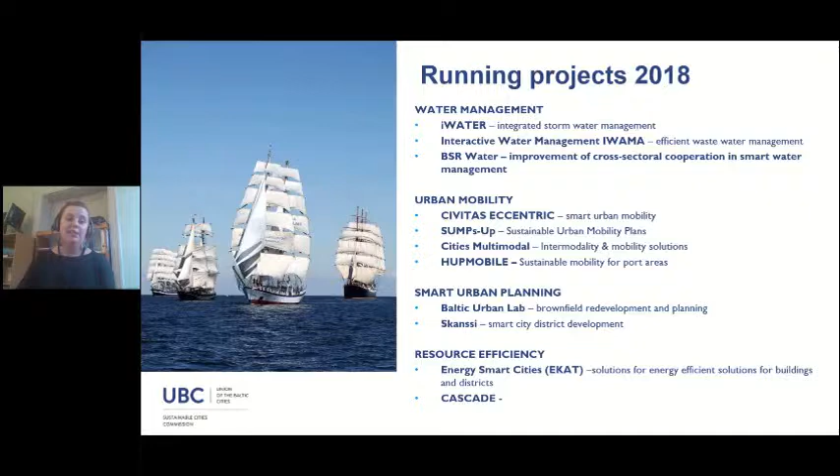When it comes to our upcoming events, as I mentioned earlier, IWAMA, our big project, will have its final conference here in Turku on January 31st. At the conference, they will be sharing experiences of the project, results, and the tools within IWAMA.

We will also arrange more webinars, which will hopefully start on time and be a bit more consistent. Next February, we're planning on having a water-related webinar. During this webinar, you'll get to have a little poll and vote on what topics you would like to have webinars about, in case you're interested in joining in the future as well.

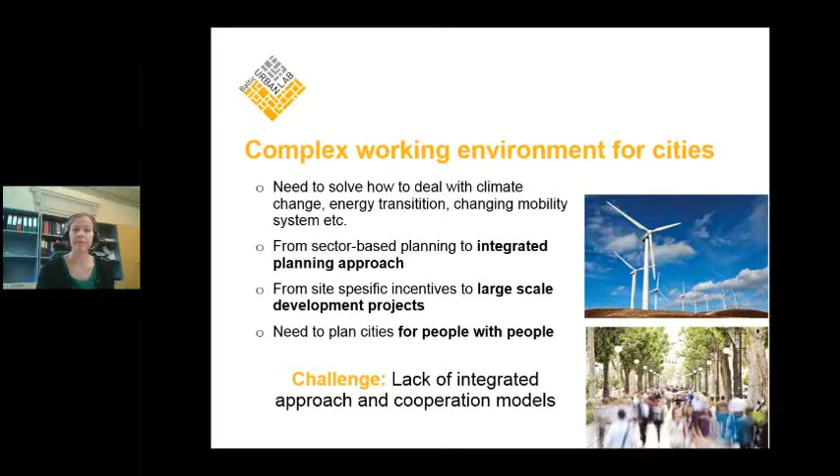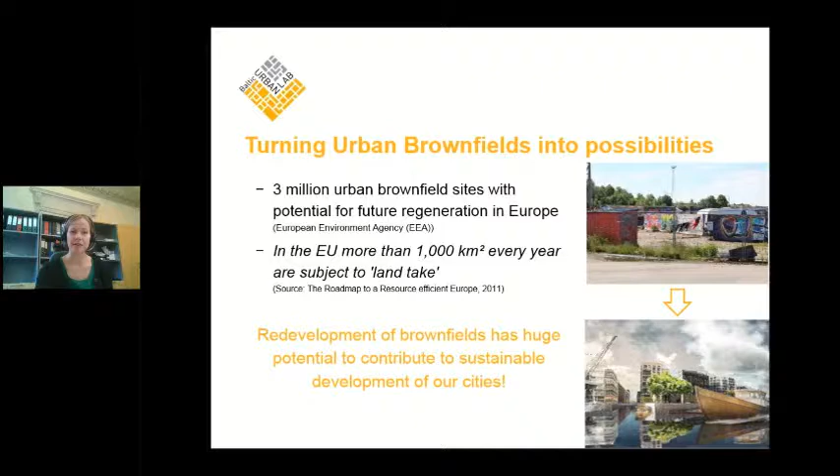Brownfield development is quite a complex process. It requires dealing with the past of the site and its contamination, but without losing the cultural and industrial heritage related to the site. At the same time, it also requires planning for the future and how the site should be used, for example in 20 years.

Based on discussions with different cities around the region, we've noticed cities have very common or similar challenges when it comes to brownfield development. Land ownership is often quite fragmented, and there's usually a very large number of different stakeholders involved, like landowners, developers who would like to invest, citizens, and companies acting in the area. This causes a lack of common development vision. And we shouldn't forget the technical, geological, legal and financial challenges when it comes to remediating the contaminated land.

We believe close cooperation and partnerships between different actors is very important, especially in brownfield development, from the beginning of the planning process, to tackle these key challenges. Due to the complex nature of brownfield development and the related high risks, it's very important to find from the beginning a common understanding and commitment to the process between the different actors involved.

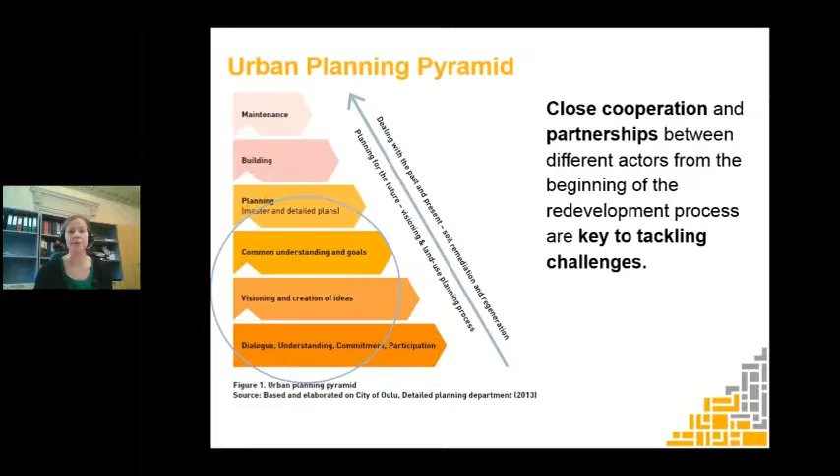The process should always start with an open dialogue involving different stakeholders as well as citizens in the planning. But often cities lack methods, practices and previous experience in how to engage these different actors in the planning process. We've tried to deal with this in the Baltic Urban Lab project, a 3-year project looking at how to support more open, inclusive and efficient planning of brownfield areas.

The aim has been to test integrated planning and partnership models for the development of 4 brownfield sites. This has been done in practice in 4 pilot areas: Norrköping, Tallinn, Turku, and Riga. Together with stakeholders, they have tried to find a vision and development plan for each area, and tried to engage different actors better in the process by testing traditional engagement methods, but also very novel approaches.

Based on the experiences in the project, we wanted to share our experiences with other cities, which is why we prepared this guide. It's based on practical experiences from these city pilots, but also dialogue with other cities. The guide demonstrates a more integrated and systematic approach to planning brownfield development, focusing especially on the early stage of development and planning, with the perspective of how to engage different stakeholders better. It also includes concrete case examples and useful tools for other local authorities tackling the same challenges, and is available in different languages.

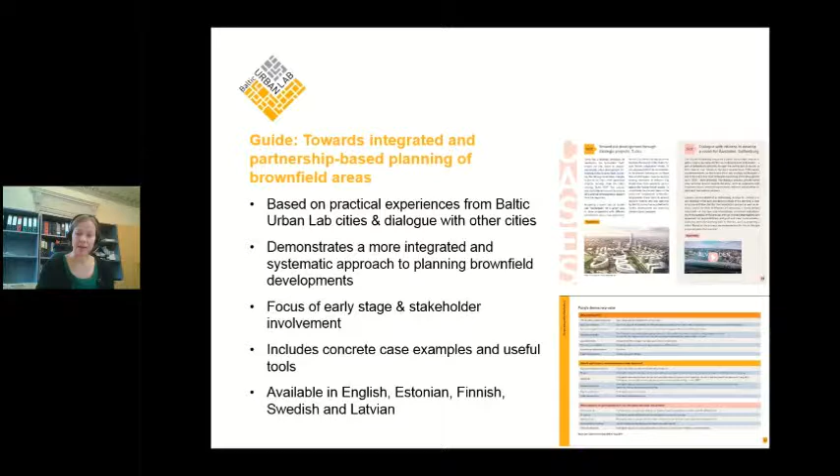Of course the planning system and procedures, as well as the organizational setup, are different for each city, and each development process has its own challenges, specific context, and stakeholders.

We have identified that there are always certain issues in the development process that should be taken into account. So we have gathered in this guide 10 crucial topics that should be considered in a brownfield planning process, so that these public-private-people partnerships could be better supported and the planning process could be more open.

The guide has been divided into 2 sections. First is internal organization and preparation, how to organize the process within the city administration. The second is focusing on really cooperating with different stakeholders.

There are several stages in both the soil remediation and regeneration process, when we talk about how to clean the contamination of the soil, as well as in the visioning and land use planning process, when stakeholders could and should be involved. Of course, their role and the benefits gained from cooperation also vary from step to step.

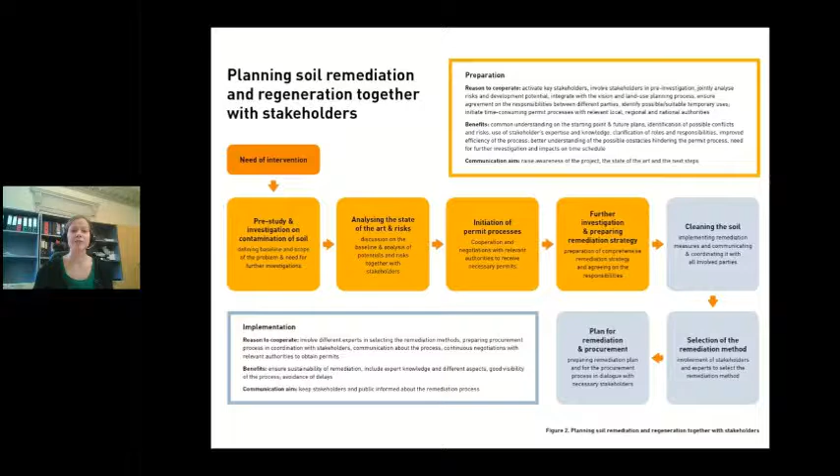We wanted to create a couple of simplified illustrations about the different steps in the process. We also have a process scheme for the visioning and land use planning process to show that it's step by step, and there are different ways to involve stakeholders in each step.

Let's start with the first part. I will go quickly through these different topics that we have considered important, but there is much more information in the guide itself, which can be found on our website.

If we want to plan these cities for people, different stakeholders and especially citizens should be involved in the planning process already from the beginning, when visions and strategic plans are made.

But this is often a struggle for cities, how to involve different actors, especially in this quite abstract stage of the planning process. There are not necessarily any plan proposals yet, it's more about visioning how we would like to develop the site. But it would still be important to involve different actors at that stage.

These kinds of visions and strategies may have a bit unofficial or unclear status towards statutory planning documents like the detailed plan and master plan. So it's very important to define how they are guiding the process and how these visions are actually implemented.

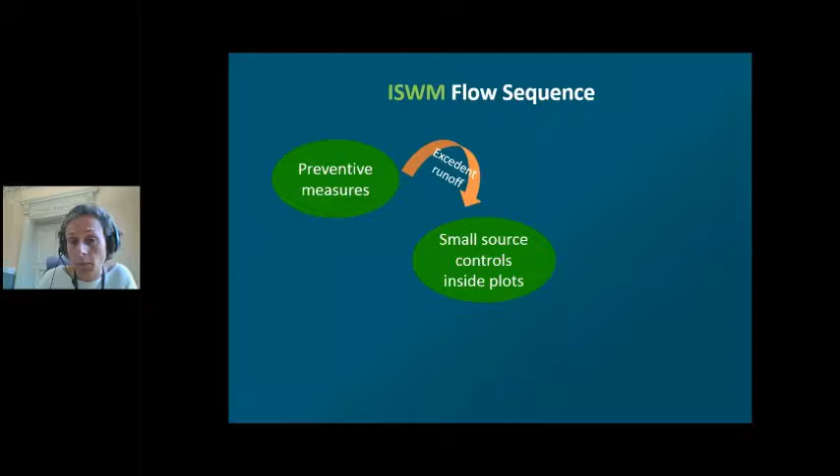First we have to use preventive measures. These are decisions that we make at the planning level to reduce the amount of runoff appearing in an area. Then we try to control the excess runoff where it's appearing, using small source controls, for instance in courtyards inside the plots. Finally, we have large structural controls used in public areas at the urban level. I'll give examples of each of these three groups, but integrated stormwater management means using all three groups at the same time, not just one of them.

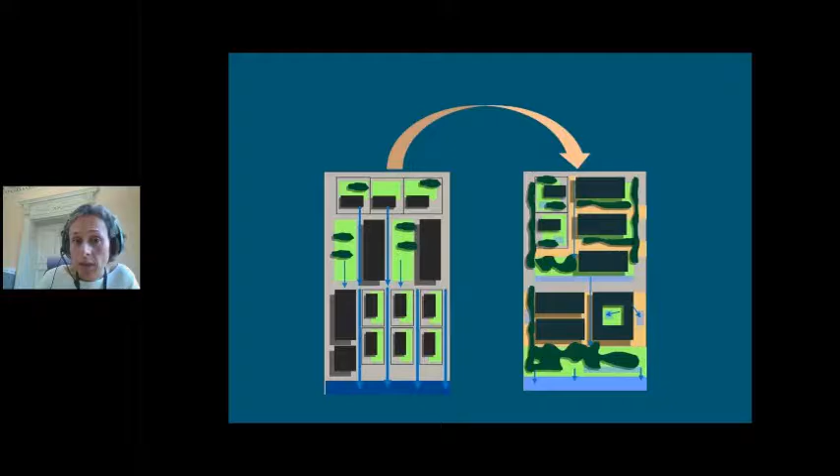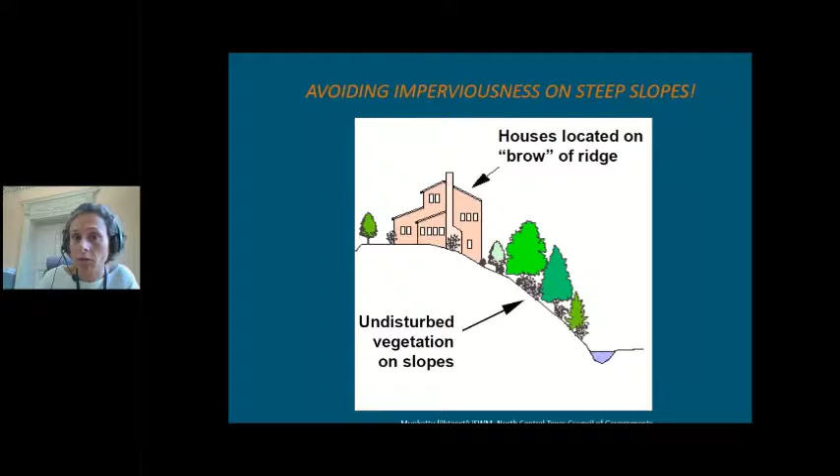And how do you do it? Well, for instance, you can avoid imperviousness on steep slopes, trying to keep undisturbed vegetation on slopes and build on areas that are not steep. Reducing impervious surfaces, you can use narrow streets in residential areas, which is also a traffic calming feature, as you can read here, and it also keeps residential areas more silent.

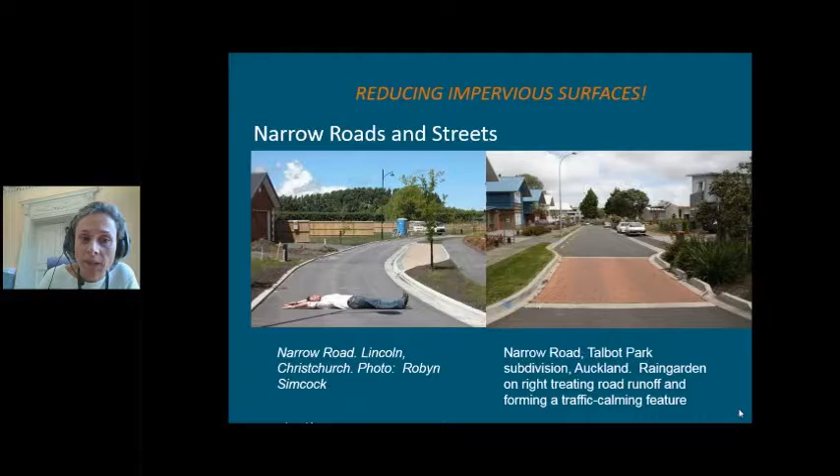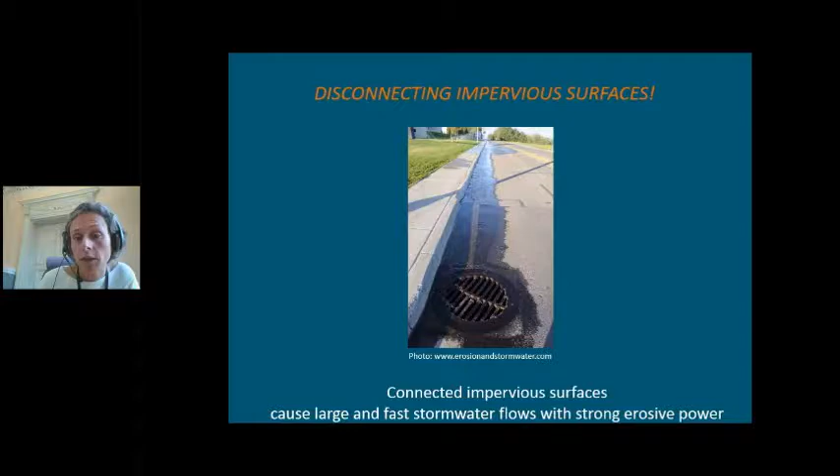And it's very important to disconnect these impervious surfaces, because with the same amount of impervious surfaces in an area, if they are connected they produce a larger amount of stormwater flow, and the speed of these flows is higher, so they have more erosive power.

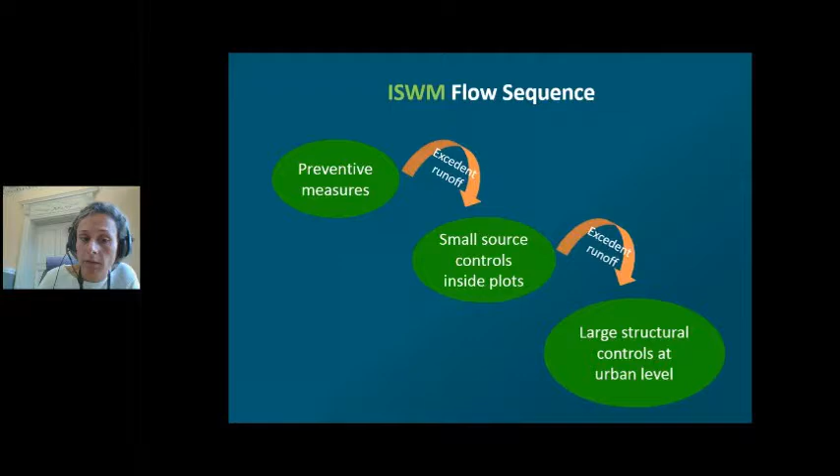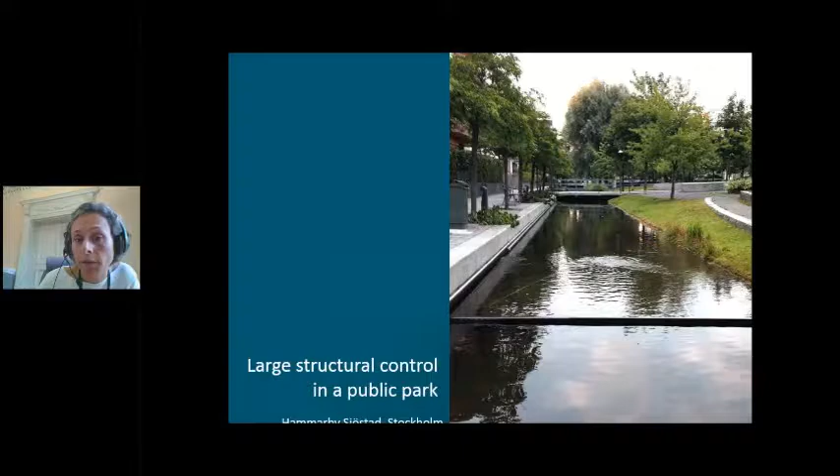And then finally we have the large structural controls at the urban level. This is another example from Stockholm. You can see this is a long and large park that, with a kind of inclination, is collecting the stormwater in this area. This is a permanent water retention basin, but the level can grow with extreme rainfalls.

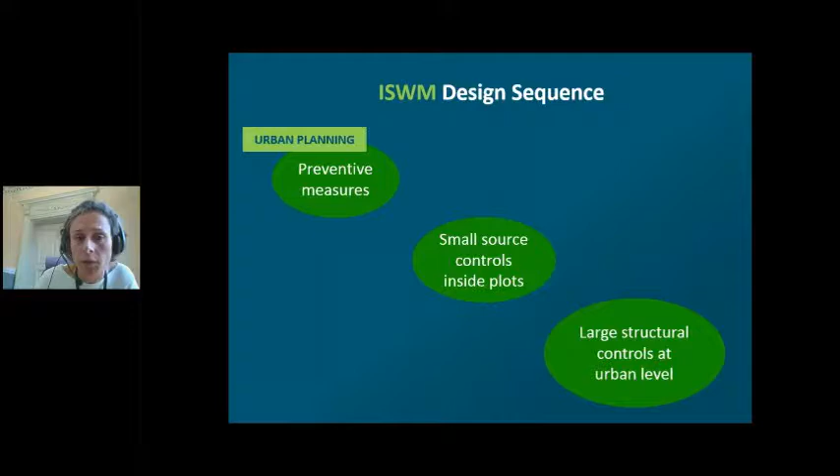Now I'm going to explain the design sequence. I was explaining the stormwater runoff flow sequence, which is quite logical, but the design sequence is a little bit different. We start with urban planning. At the urban planning department, we can use preventive measures when we are planning our areas.

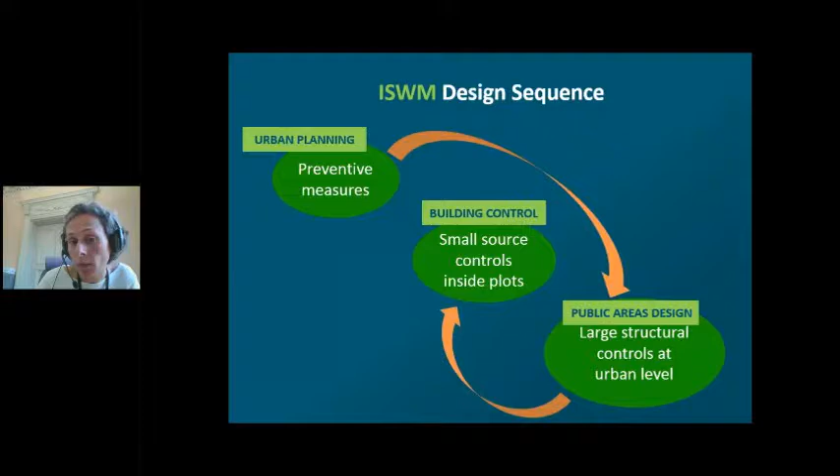But then the next step is larger structural controls design, made for instance in public areas design departments. And finally, we have the small source controls designs that we do in the private lots. This is something that the building control department takes care of in the design of these small source controls. But as you can see, we have a kind of gap between urban planning and building control.

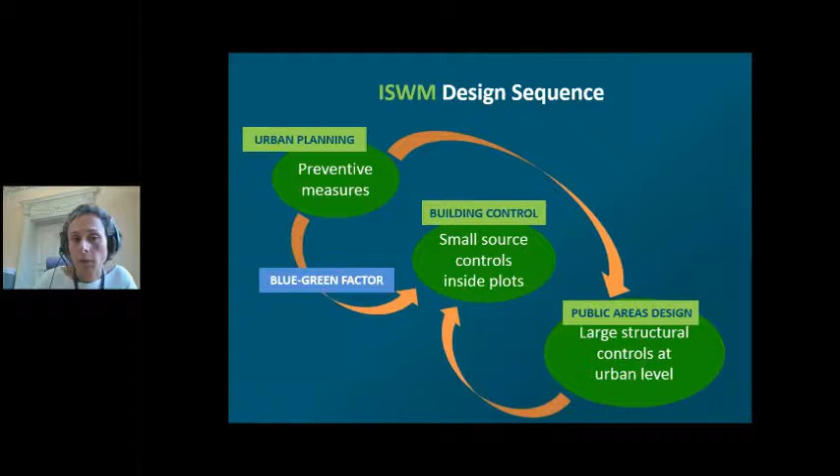The idea was to fill this gap with a blue-green factor. How did we do this? The solution we found is that we can use the building regulations that come with the detailed planning. So when we are designing and planning an area, we can make requirements for the buildings that are going to be built in the private areas. This is called building regulations in Finnish. I don't know if the translation is correct to English because I couldn't find a good translation, but we have been using three for this blue-green factor: minimum green area, green factor, and in Finnish, Hule-100, but in English would be a kind of blue factor.

I'm going to show you first how this tool looks. This is the information plot sheet, and you just fill in the information here, like the address and all kinds of information about the private lot. And then we have these building regulations that I was presenting in the PowerPoint.

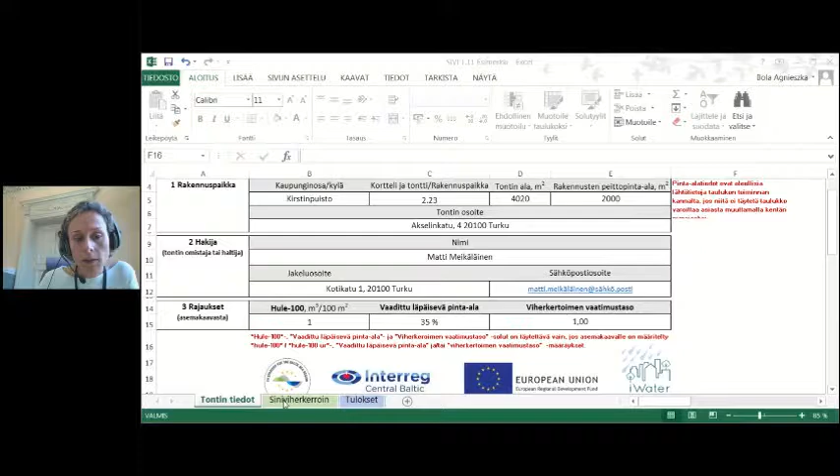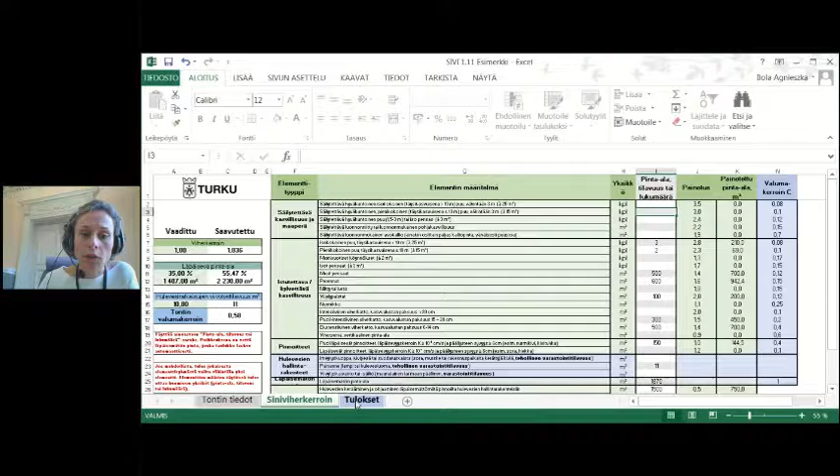The next step is to fill in the blue-green factor. Here is the blue-green factor sheet with the information in this column about the green areas. And finally, you just have to print in PDF or on paper to send it to the building control department when you are looking for a building permit.

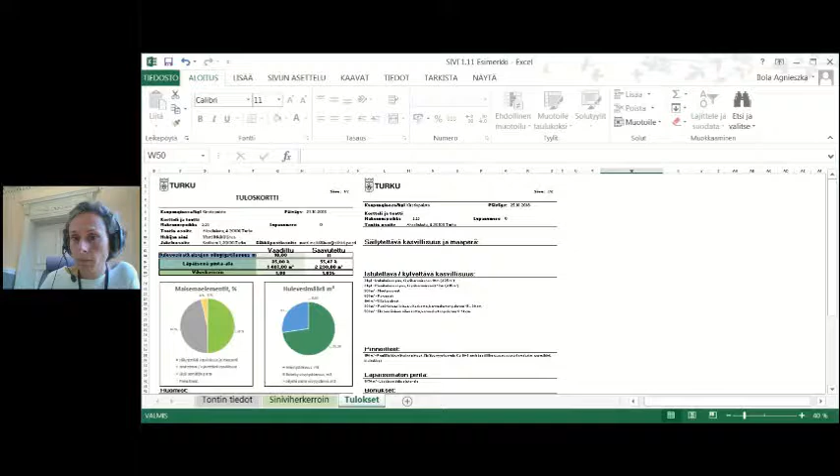This solution, the solution sheet. So I think, can I come back to the PowerPoint? I think it's this one. Is it like this? I think it's okay. Yeah, okay, thank you.

Coming back to the PowerPoint, now that you could see the toolbox, which is just an Excel calculation sheet, we have this plot information sheet, and as I was showing you, we fill in the minimum green area, the blue factor, and the green factor. The minimum green area — I'm going to explain where these building regulations come from.

How are they calculated during the detailed planning development? So the minimum green area comes from - I'm showing you now our pilot site in iWater here in Turku - Kirstinpuisto, and this area was developed with this kind of large structural stormwater control. Here in the middle, it's similar to the one I was showing you from Stockholm. It's a longitudinal green area or park that can collect stormwater because this area is inclined, and it can have this kind of stormwater collection here.

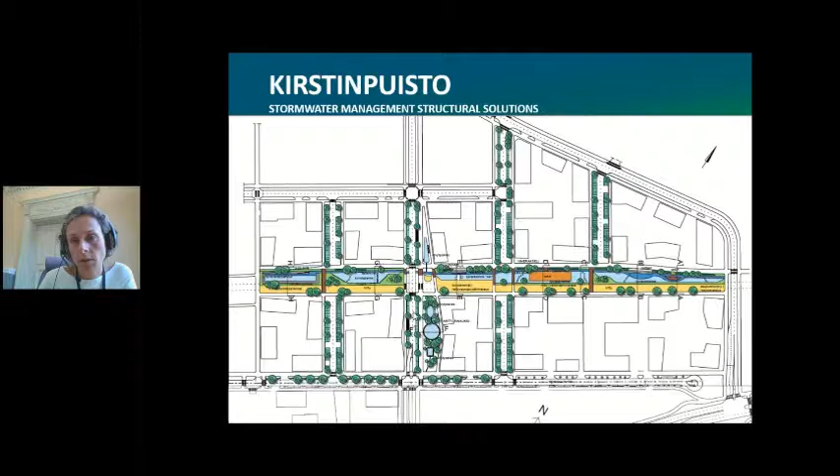So when we were making the hydrological calculations, the engineer asked me what percentage of the private areas would be permeable. This is something that we don't know right now; we have to take it as an assumption for the calculations. I was seeing that this could be a kind of risk, because if later, when we are building and developing these private areas, we don't take this minimum permeable area into account, these areas would be undersized for the stormwater collection.

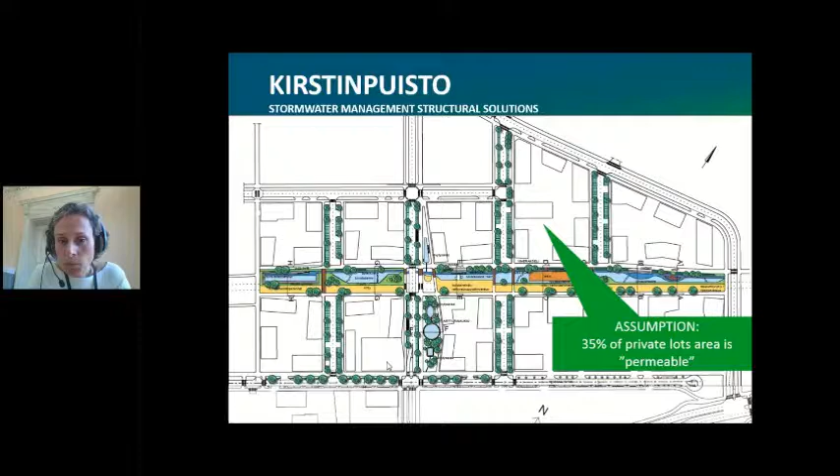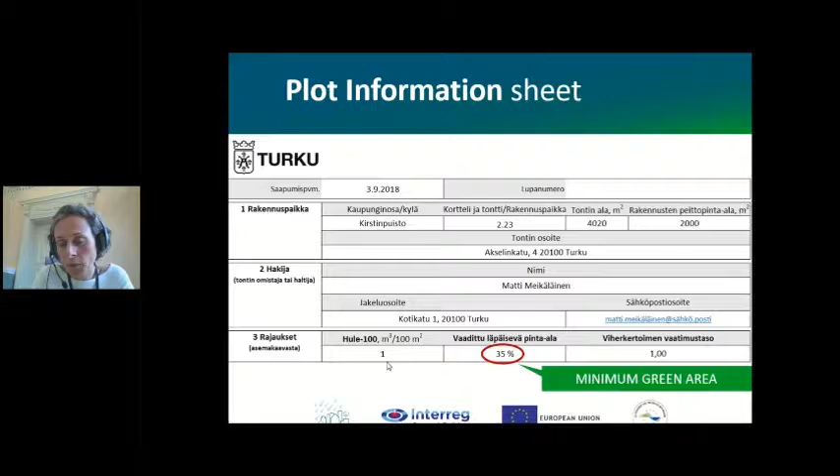So that's why we had to put a kind of minimum green area, or minimum permeable area, as a building regulation for this pilot site, and we hope that we can continue to use it later in other development areas.

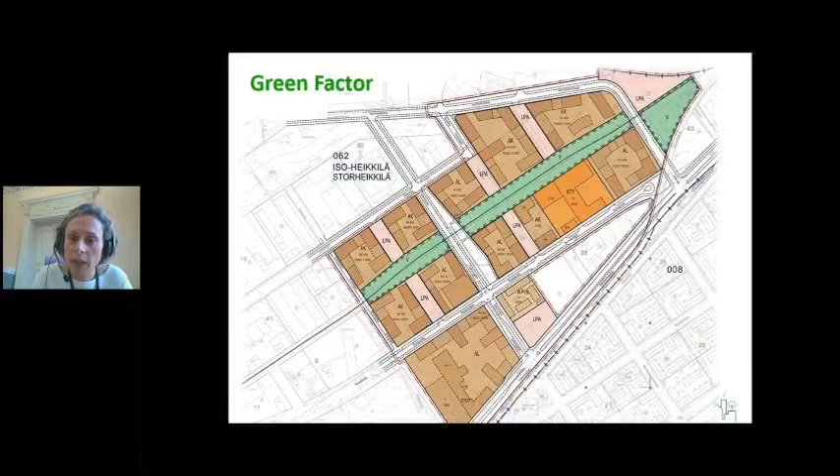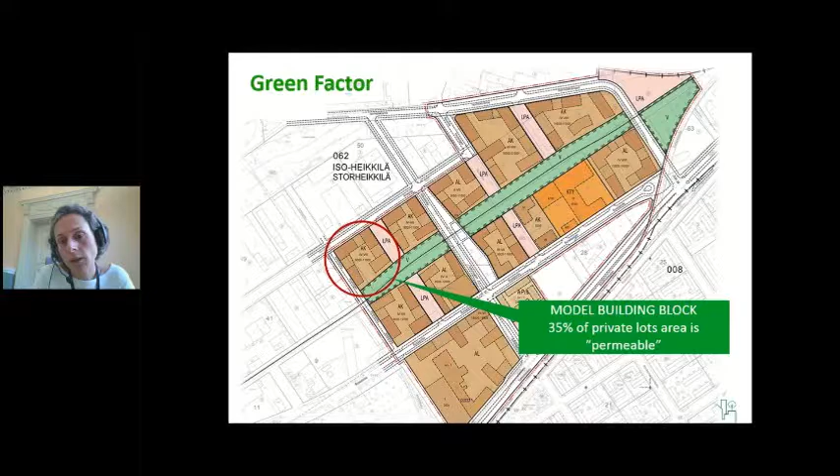The green factor is going to be calculated using also a kind of model building block, where we asked a landscape architect to develop this model building block and make a design using at least 35% of the private lot as permeable. And she made this kind of design.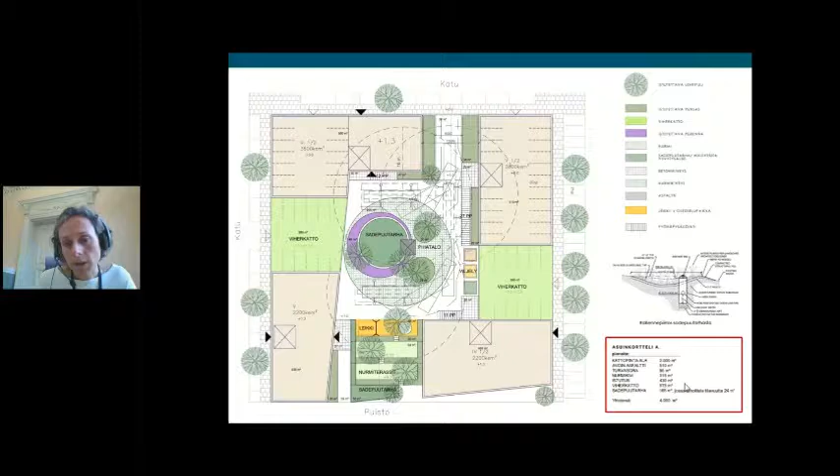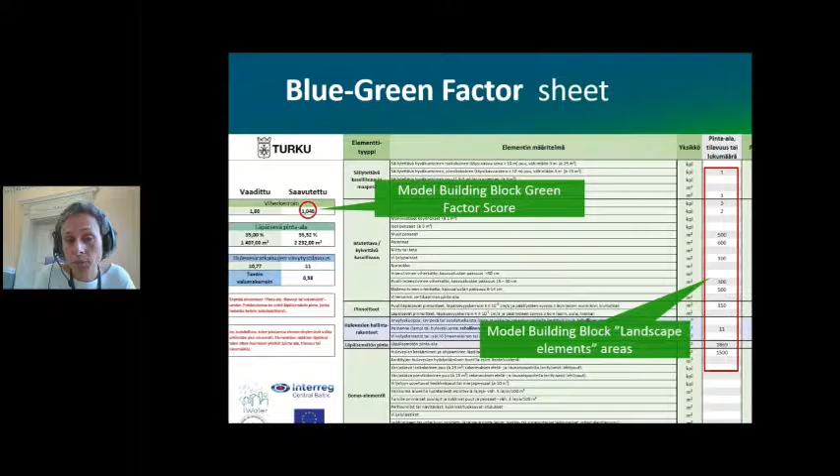And then we asked her if she could calculate the different green elements or landscape elements she was using, giving us the area of these elements used in the design. When we had this list, we could test it in our blue-green factor sheet and see how much this model building block was scoring for the green factor. This way we could set the green factor for the pilot site as 1, as you can see here.

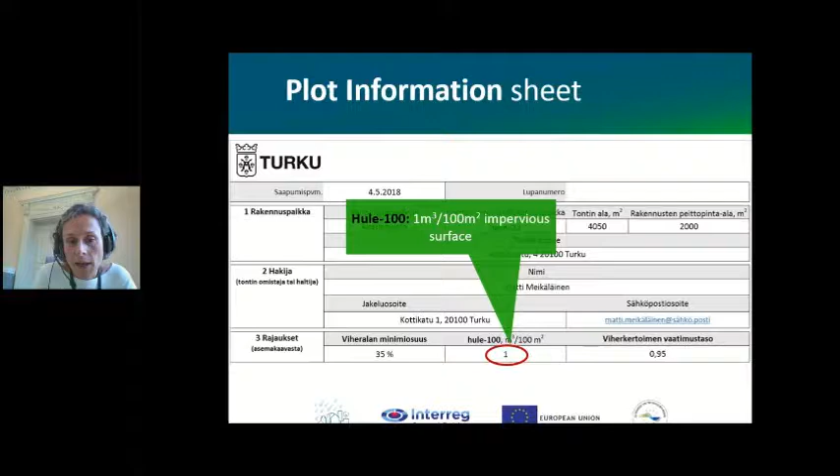And finally, this blue factor that we call Hule-100 is just one. It's a factor already used in some developing areas in Turku, and it's mandatory: 1 cubic meter per 100 square meters of impervious surface in the plot should be retained in the plot. You just fill this with the number — it could be half a cubic meter or probably 1.5 cubic meters, but right now we just have 1. Then it automatically calculates how much cubic meters you have to retain in your plot, depending on what you were filling in the column of the green elements.

You can see here that there is a cell you cannot fill — it's automatically calculated, and it's the impervious surface of the plot. Based on this, the required amount of cubic meters should be 18.69 and not 10.77, and that's due to this runoff factor that's calculated for the whole plot.

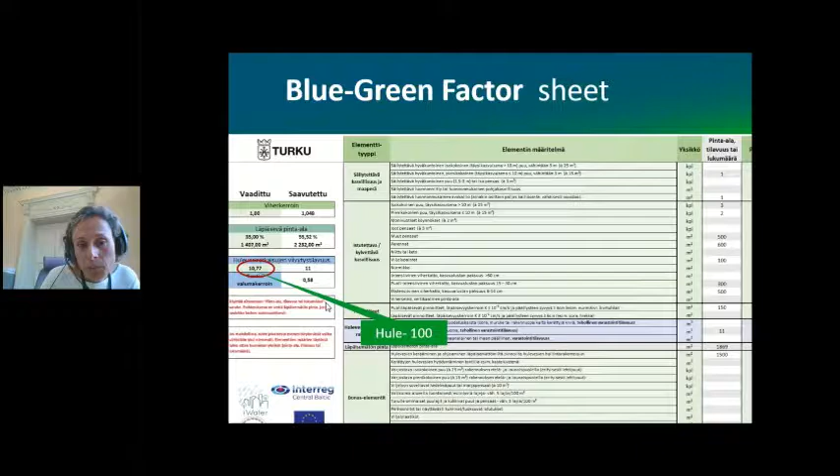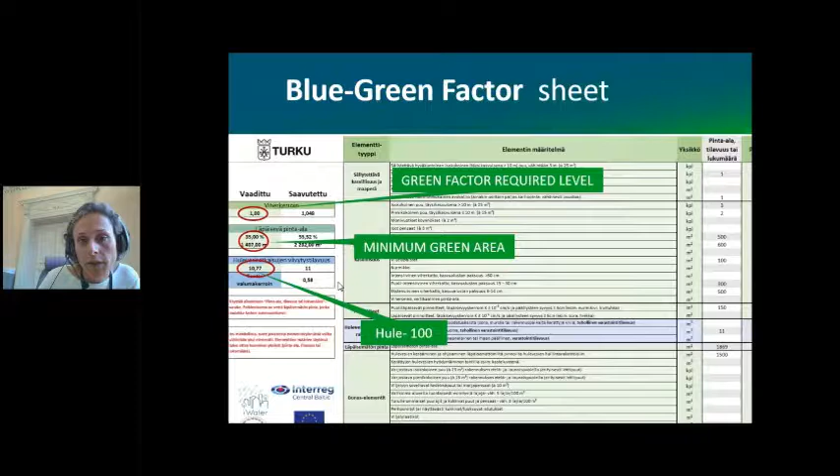The more green elements you put in this column, the smaller this runoff factor becomes, and it's multiplied by this amount, so you can reduce it that way. Just using more vegetation in your courtyard, you can reduce the amount of stormwater that you have to retain in your plot. And then I can finally show you also the minimum green area here — it's calculated, the required amount, the one that has been reached by the plot, and the green factor required level. Well, that was all.

Thank you very much.

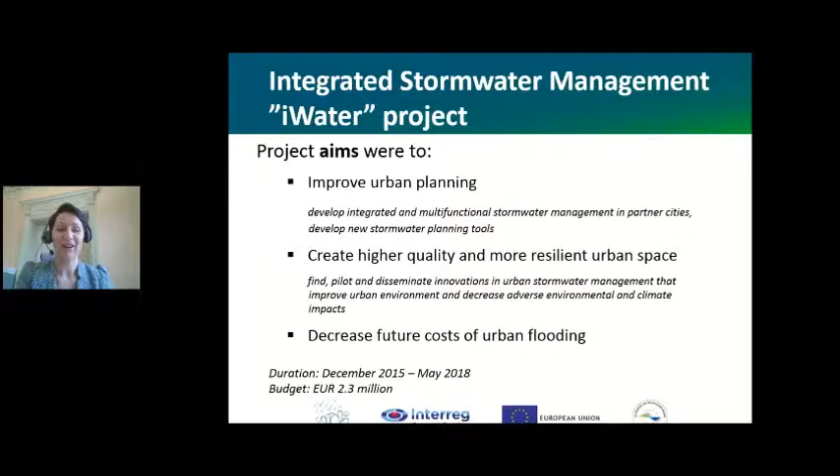Here you can see a little bit also other results which I mentioned, like the green area factor tool, or the local adaptation that was explained by Pilar. If you're really interested in how other cities implemented and tested this tool, please also visit our iWater website, because you will find there a section with local adaptations. You will see how the city of Helsinki is using that tool, or our Swedish cities, or how the tool was adapted and modified, for example, in Riga, Latvia.

Apart from the green area factor tool, we have also created this integrated stormwater management toolbox, which I'm going to explain in a little more detail in a couple of minutes. But we also have had very interesting pilots on multifunctional stormwater solutions, and those could be also found on our website. For example, the city of Helsinki has developed a stormwater filtration unit, and this is very interesting. I think you might be interested to check it out.

We also implemented in each of our cities either new integrated stormwater management programs, or updated, in the case of Turku and Helsinki, already existing ones. All the lessons learned and experiences from that process we included in the integrated stormwater management guidelines, which has 12 annexes with ready-to-use tools and sheets. So I very warmly recommend you visit the iWater website to see all the results.

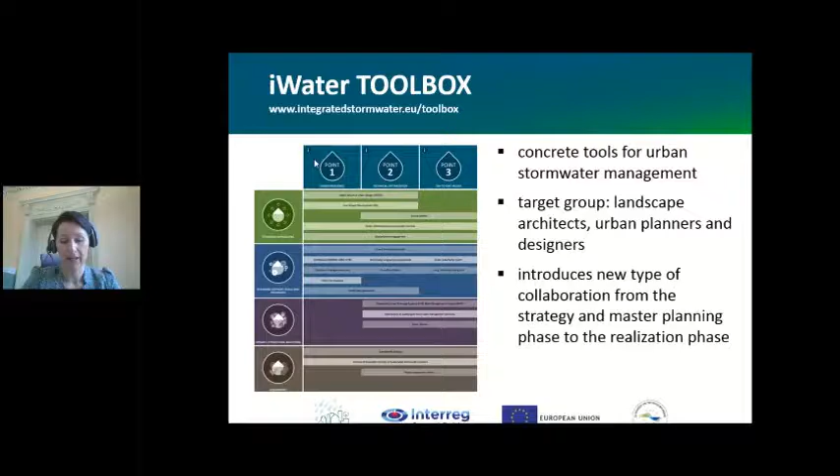Let me move further on. So when we are talking about this 3-point approach, we have here the technical optimization, and those solutions or tools deal with the defined so-called design rainfall in order to meet the locally defined service levels. These tools are used in rather traditional drainage network design, when there is a certain measure of rain events over a certain lifespan, for example once in 10 years, and the capacity of the network is designed exactly to take care of this sort of rain events. Under that section you will find some useful tools that fall under this technical optimization, which could be used even with a bit more sustainable approach to stormwater management.

So here, for example, you will find the green infrastructure audit, the runoff coefficient calculation, watershed assessment, or sustainable urban drainage systems.

Sometimes when we are already facing climate change and more intense rain events, we need a more urban resilience approach to mitigate these effects of possible extreme rains, as well as creating the technical basis for adaptation to changing scenarios. So in the urban resilience section, you will find specific tools supporting the resilience approach, for example the cloudburst management plan, flood risk mapping, or LEED certification.

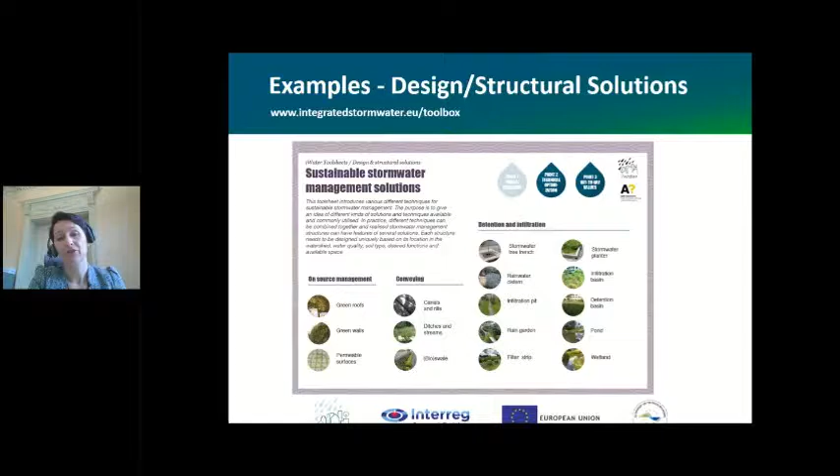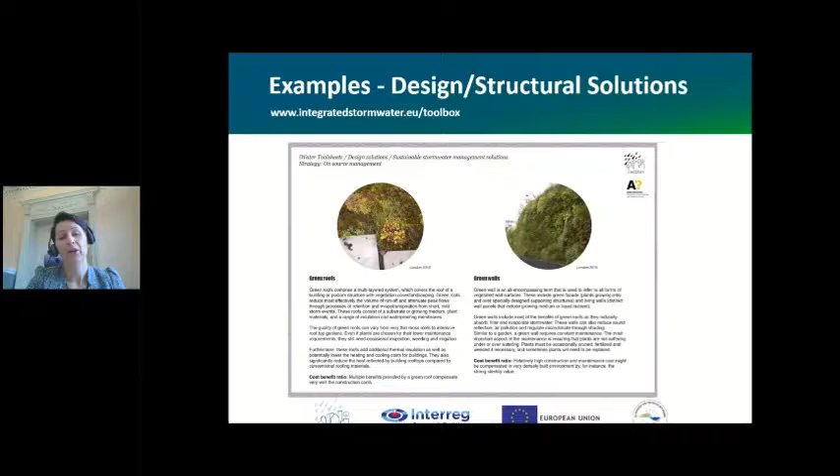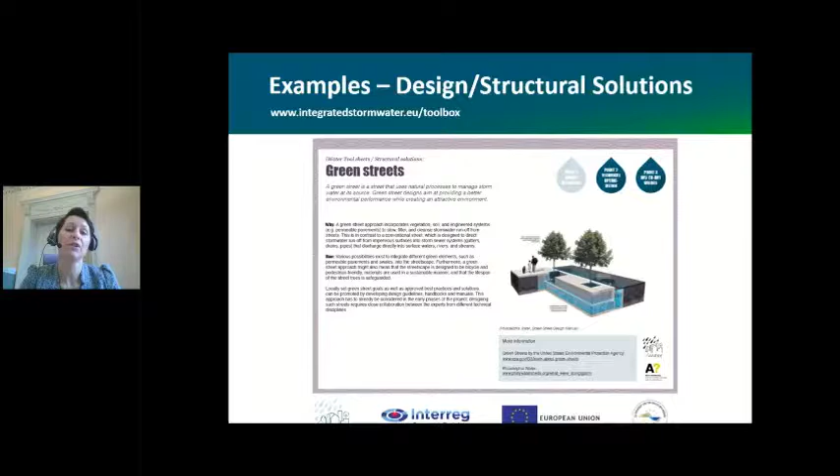And when you go further, you will find the concrete description on how to recognize the specific solution, what are the characteristics, what are the cost-benefit ratio, and preconditions for implementation of this specific solution. Here is another example of the green street as a structural solution.

That was it on my behalf. I very warmly recommend you to visit the toolbox and see what solutions we have gathered for you, as well as visiting the iWater project website for even more interesting concrete tools. I hope those will be useful for you. Thank you very much, and I'm happy to take any questions.